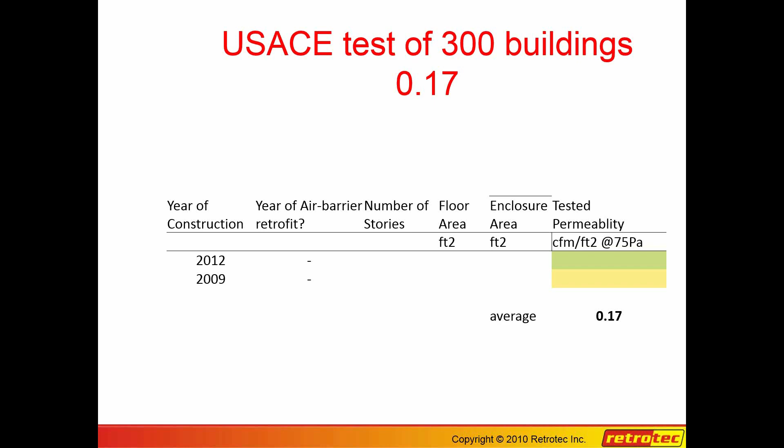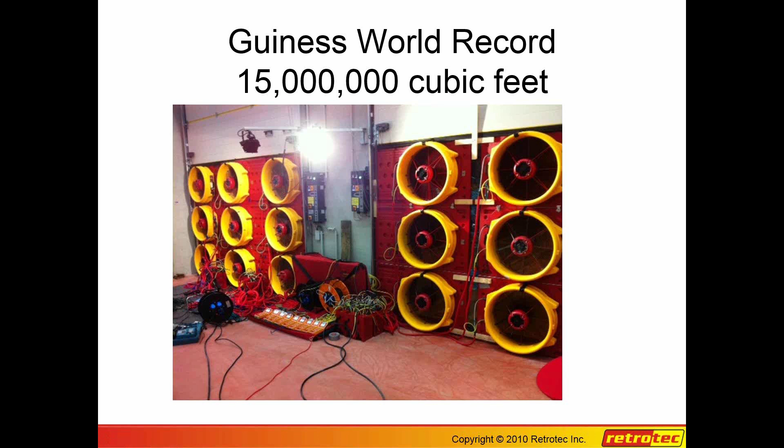So the simplest building that we can consider is just one big box, and pretty much doesn't matter where you put the fans. You can put them anywhere, and you pump up the box, you measure the pressure anywhere, and so on. So that's pretty simple. That's kind of what testing a house is like. You pressurize the entire house, even if you've got a partially open doorway. There's very little volume behind the doorway, very little surface area to leak, so you pretty much get exactly the same pressure instantaneously everywhere in the house.

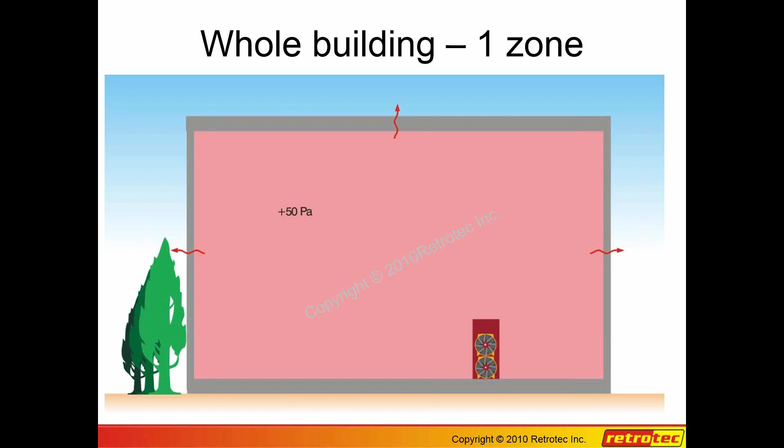So as we move on from there, we get more complicated situations, and I'll just look at our next slide here. There we go. So this is what a connection looks like in a large space. We're doing all the connections from outdoors simply because there's more room. Normally you do these tests from inside, but you should be able to do them from either side. With our equipment, the red tube always goes through the panel, and here you see it going through the panel into the inside portion of the building like this. And if you're inside, the red tube still goes through the panel.

And in that way, our fans are referenced, assuming that the red tube that goes to the red port is going through the panel. So since in this diagram here we're outside, the blue tube, which is, I guess, the positive side of channel A, is picking up the pressure outside. And here we've simply teed this off, so we've got a T on here, and we're picking up the pressure in 2 locations, roughly to the extremity on one side versus the other side of the building.

We're not going to get into a lot about the best places to pick up pressure. We're just going to look in this presentation primarily at how we should be making our connections. So here we've got, going to the fan, this kind of orangey brown connector, which is the control going to the fan, and we've got a yellow tube that picks up the flow pressure, and we've got the green tube, which is the reference port.

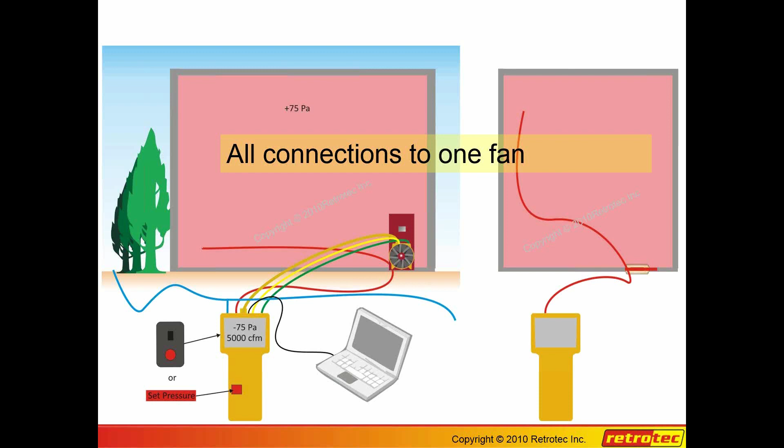There are some interesting connection possibilities that happen when we're testing large buildings where the reference pressure is being affected by another fan. When we have these self-referenced fans, we never have to worry about it. So just a word on that.

So this is one gauge hooked up, and here we're kind of breaking it down. We've got the gauge outside, we've got the red reference tube going inside, and we've got one large volume, so we can pick up that pressure anywhere, it doesn't really matter.

A good rule of thumb is if we've got one gauge, we probably need to pick up one pressure inside the building. By the time you get to 3 or 4 gauges, you probably need to pick up pressures in 3 or 4 locations. But usually one fan is doing one floor, or a volume of building small enough that a single pressure pickup inside will work. We can also, if we have to, tee them together and get some kind of funky averaging system inside the building, but usually it's not necessary.

So this is us outside the building, and this is what it looks like if we're inside the building. We reversed everything. You'll notice that now the gauge is inside. The red tube is running through the panel, same as it did over here. But now our pickup points outside are red tubing as opposed to blue tubing. The reason we color code them is so that you can't make a mistake when you make a connection. As long as you put color to color, you're okay. As long as red tube goes through the red panel, you're always okay.

We show over here that these tubes should be roughly about 25 feet from the building. The reason for that is that when the wind blows, it tends to impact the wall and create a pressure field around the building that fluctuates much more than it does, say, 15, 20, 25 feet away from the building. This is the area where you get the least pressure fluctuation due to wind, and it's something anybody testing large buildings needs to spend a fair bit of time experimenting with, putting tubes in different locations and watching the effects.

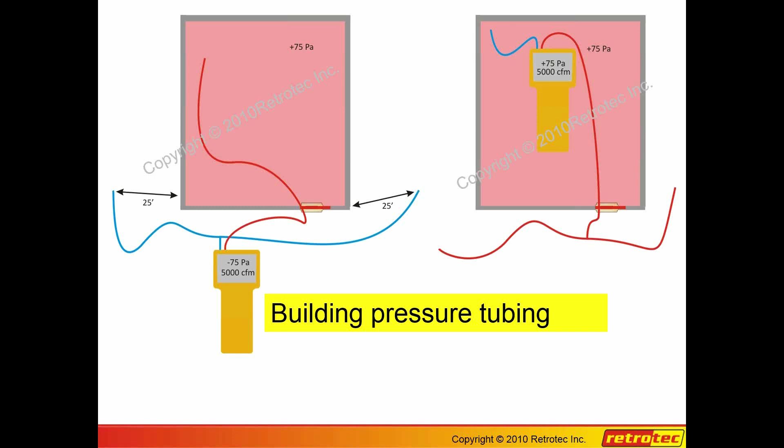So let's carry on to slide number 8, I guess. This is just kind of a review - read building pressure, flow reference. I've already gone through that, so we can hippity hop along here.

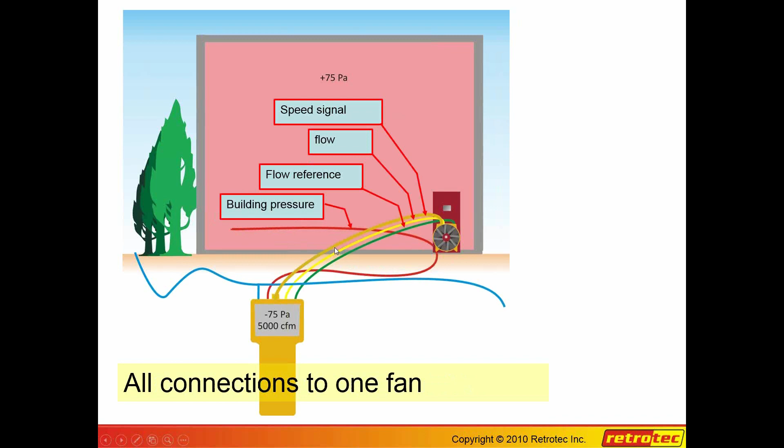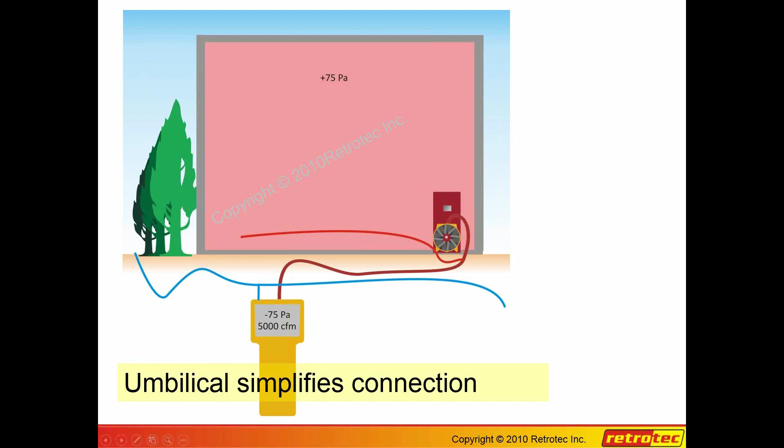In this slide we've shown how we've taken this confusing mass of tubes - 1, 2, 3 tubes and one wire, maybe even a charging wire as well - and cleaned it up into one umbilical. This makes setup much easier since you attach the umbilical on one end to the gauge and the other end to the fan, and you're good to go. Those of you who use our equipment are familiar with that umbilical approach.

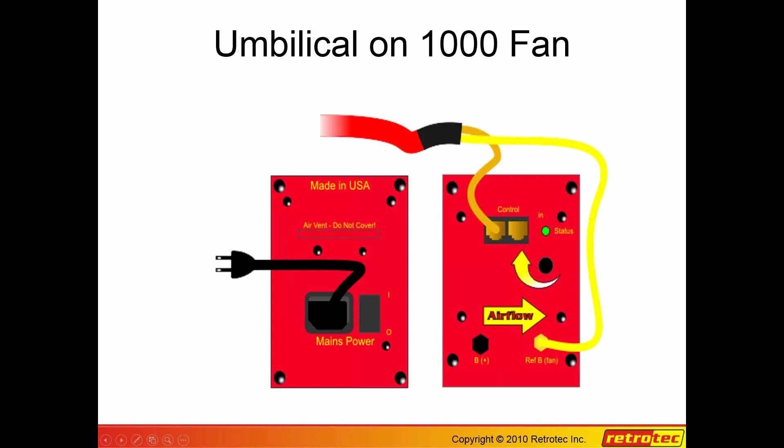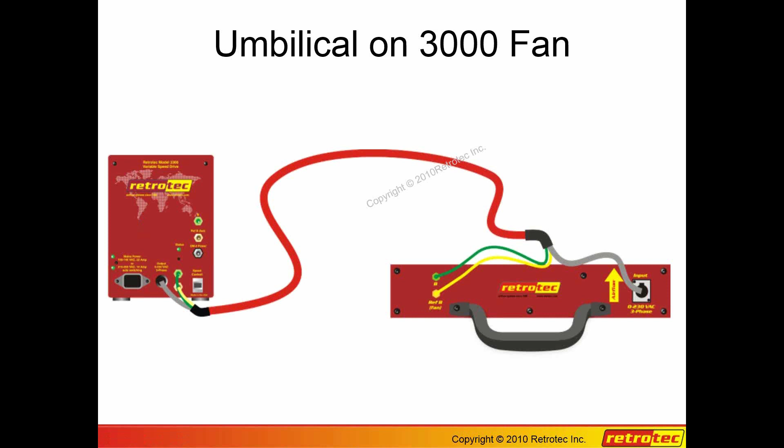Our manuals do a pretty good job of showing this, and here we've got an umbilical that goes between the top of the fan and, in this case, the variable frequency drive. This is one of our older units - we have pictures of our newer ones, which we'll get to later.

The first connection to look at is how we control our fans. In this case we're standing outside with gauge number 1, which we can call our master. This master is basically enslaving all 6 fans, so our control signal is going from 1 gauge to 6 fans. All 6 fans receive the same instruction, maybe go to 50%, and they all go to 50%. Those 6 fans act like one big fan - they just happen to have 6 separate fan blades, all going in concert up and down together.

If instead we sent 6 separate control signals to those 6 fans, if one picks up speed a little bit, another one might slow down, and you can get a situation where one fan stops completely and the other fans take over the whole load, becoming a big hole in the building. With regular house testing fans that use permanent split capacitor (PSC) motors, if they stop and there's enough pressure in the building, that fan can actually start spinning backwards and even run backwards. I've had situations where I got 5 fans running forward and 1 fan running backward, and that building showed as being a lot leakier than it actually was.

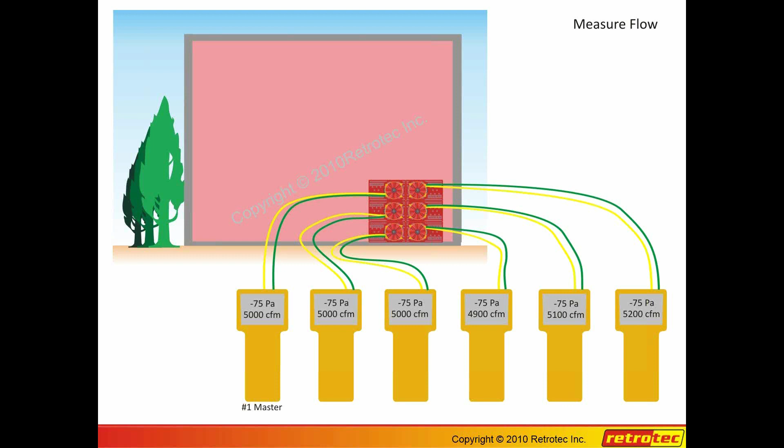Okay, now we're looking at the building pressure. We're looking at this one layer at a time. We looked at the control signal, we looked at the flow signal, and now we're looking at the channel A signal, which is the pressure we're achieving in the building and the pressure we're picking up outside.

What we encourage here is that we want each one of these gauges to receive the same reference pressure. Maybe reference pressure is a bad name -- the outdoor pressure should be the same on each and every gauge. So what we've done is we've picked up our pressure with the blue tube in two locations. We've teed it together, manifolded it all together so that each and every gauge is receiving exactly the same pressure on the input port of channel A.

So in this case we've got a red tube that goes through the panel and picks up pressure here. Another red tube goes through here and picks up pressure here. Another red tube goes through here and picks up pressure there. We've taken that pressure and just copied it or paralleled it up so that all these are getting the same pressure basically. I'm not sure why we did that, but in this particular example we don't really need to measure pressure everywhere in this box because it's going to be the same everywhere.

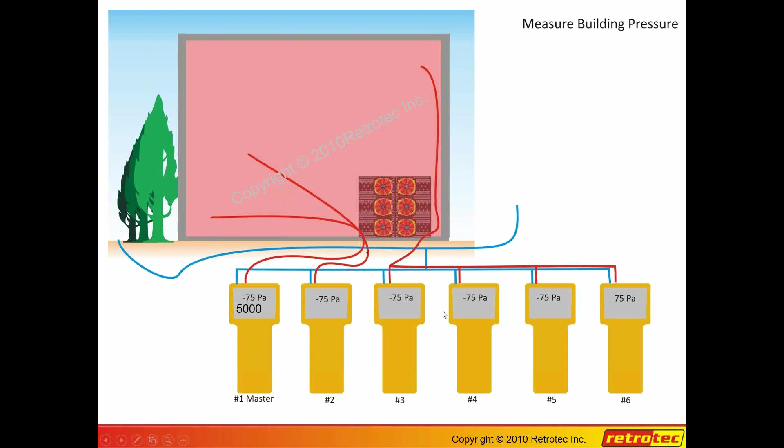So now we want to go into the individual control versus common control. Now, on the previous example here, we had common control. So we'll just back up to here. So common control means that each one of these fans is receiving a common control signal. So these are all acting as a unit. We may not always want that, and we need to be able to recognize when we want common control and when we want individual control.

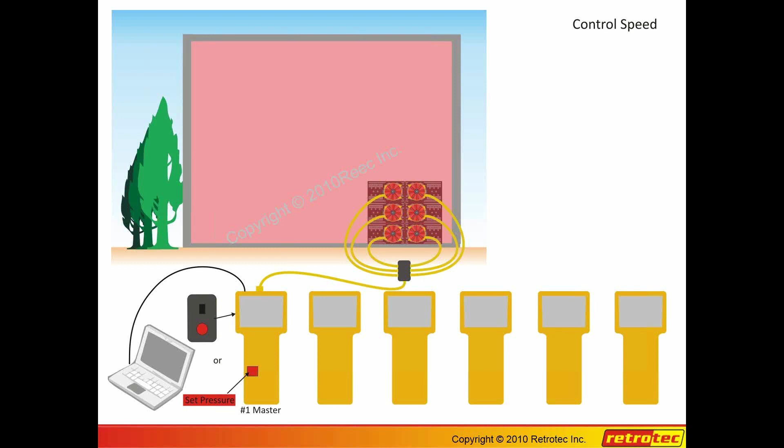The example I mentioned earlier, where one fan has got its own flow signal, it's got its own control loop, it could actually start running backwards, so we don't ever want that. So let's just advance back to where we were and take a look at individual control.

I guess I'm kind of starting this with different pressures that we might see inside an enclosure and why we might see them. So in this case, we've got a relatively small hole here, and we've got, let's say, 75 pascals here, and we've got 72.4 pascals over here. There's a difference there of 2.6 pascals. We're not actually achieving a common pressure inside the enclosure.

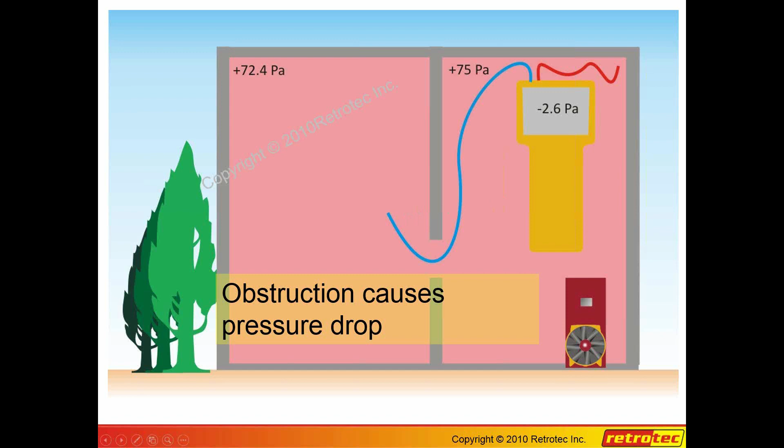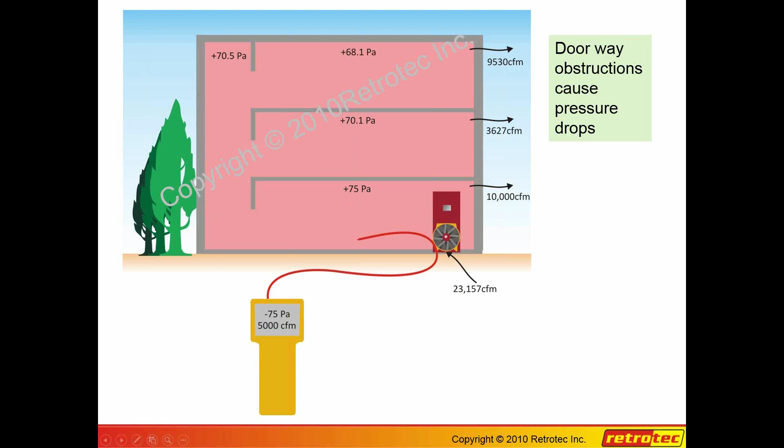Let's see if we have another diagram that will show this a little bit more graphically. So in this instance, we have one fan down here, and we've got a pressure there of 75, which is where the fan is blowing. So if we're controlling to that, we're controlling to 75. By the time we get up to here, we're at 70.1. By the time we get up here, we're at 68.1. So what do we do about that? And here we're controlling to the pressure on the mid-floor, so this is over pressure, this is under pressure.

So one way to do that is to try and distribute the blowing power around the building. Very commonly, we will have a stairwell at either end. So often the stairwell is a really good way to drive the airflow up into the upper floors. So we've got it coming from 2 sides. If we put 2 fans into one stairwell here, we would get excessive pressure drops inside the stairwell, so the pressures up at the top would be less than that.

I recall the test that we did, it was a 3-story building. We had 50 pascals on the main floor, and we had something like 25 pascals on the top floor because we didn't have enough stairwells open to the top floor in order for the flow to get there.

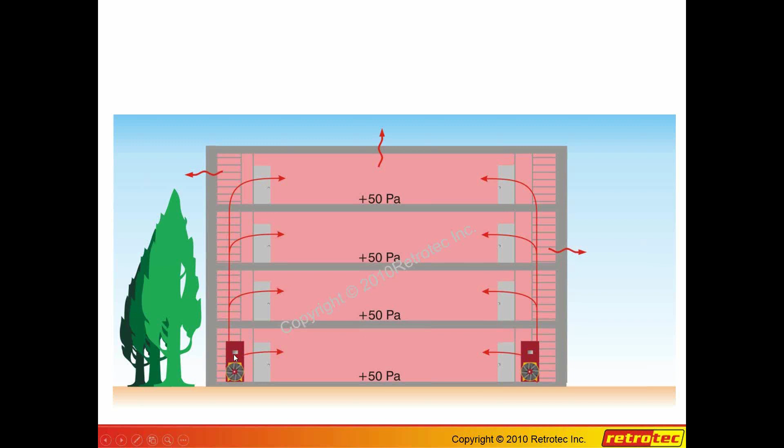So in this case here, we need to have probably individual control, since each one of these fans is controlling to its own pressure. So if the pressure was a little bit high on this end of the building, then this fan would take care of it. If it was on this end, then this fan would take care of it. I can't remember what this was there for exactly.

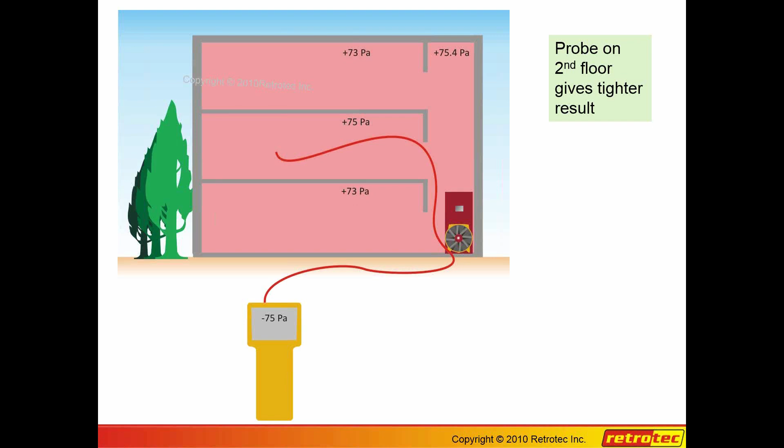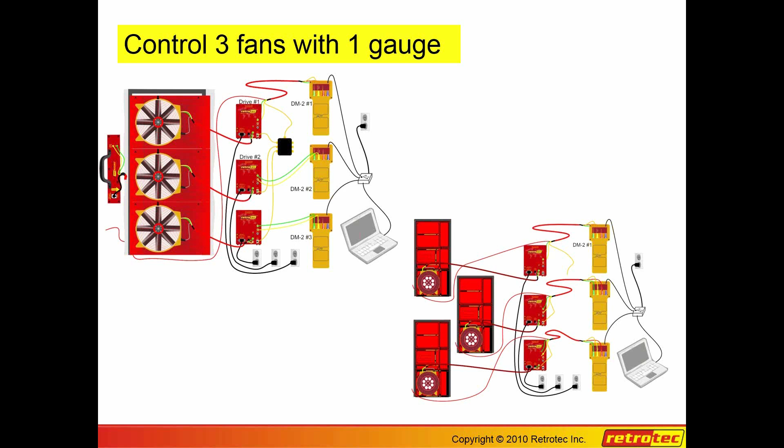And then there's a third one, which is hybrid control. There's actually a fourth one also, where you may have 2 banks of fans on each end of the building. Each one of those banks is common, but they have individual control with reference to the pressure they're controlling on their end of the building. I think I have a diagram that shows that later that will make that clear.

So what this would look like with the DM2 configuration, for example, is we have the gauges which are close to the computer in this case. So the gauges go into a hub, the hub goes into a computer, so it looks at all the different fans we have out here that could be 20, 90 feet away, that kind of thing. So here we're actually extending the tubes from the fan all the way to the gauge. So that's the way we used to do it.

This is with the 3350 control. So do we have common control or individual control? So we have a signal coming from this gauge. It says control. It's running into this fan, and the new controls all have the ability to daisy chain the controls together. So the signal comes in and then comes back out and into the next one, back out into the next one. So all 3 of these controls are receiving the same control signal.

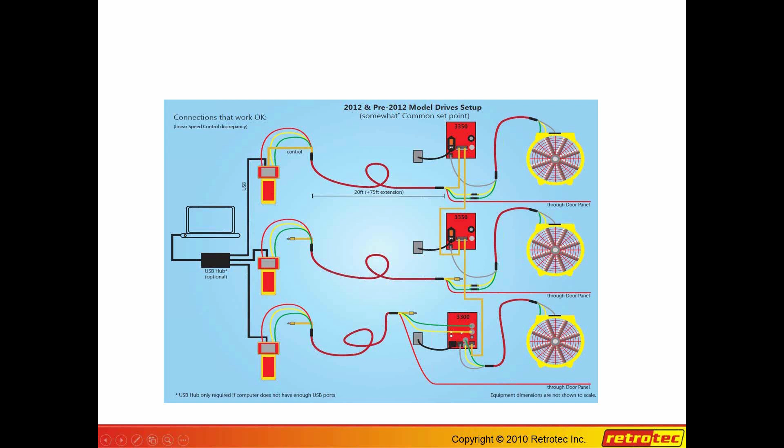Each fan receives the same control signal. Not necessarily that the flow going through the fan will be the same. So the flow signal comes back through here to its gauge. This flow signal comes back through here to this gauge. And notice here in this diagram we've shown this control connection is disconnected. This gauge is not controlling anything. This gauge is controlling everything. So this is our pre-2012 setup. So let's take a look at what we're doing now.

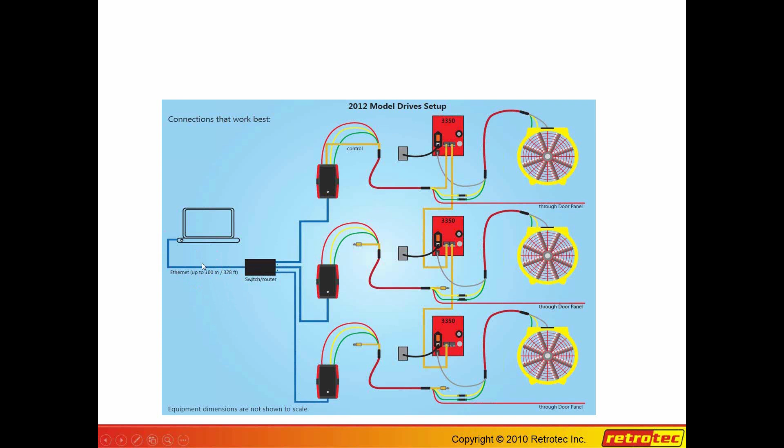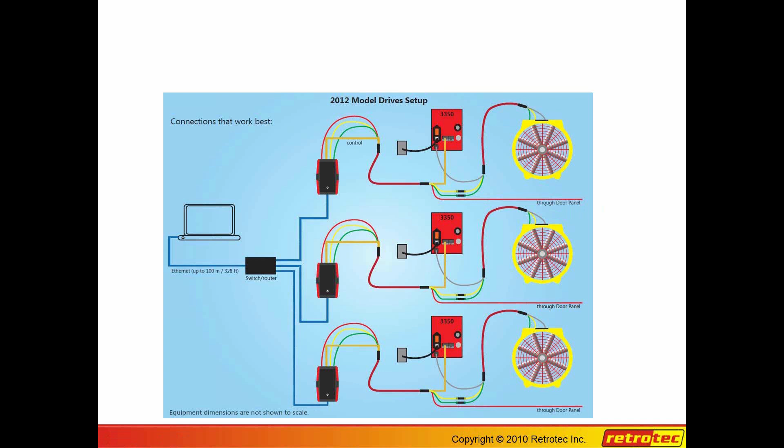So you can create common control simply by wiring it in such a way that one control signal is daisy chained into all 3 fans. You can also make the change in the software where you have individual control cables going to each fan, but you simply uncheck the individual control box, which means unchecked is common control, and that means that the number 1 gauge that you've chosen is the one sending out the control signal.

So this is global, meaning it would change the signal going to every fan that you had on your network. It would be either individual or common. In a lot of cases, you want to have individual control, meaning the software is controlling the East Bank and the West Bank individually, but yet the fans within that bank were commoned, if you know what I mean. And the best way to get a handle on this is to go through our exercises on that so you can experiment in a relatively small space and you can see the effects of individual versus common control.

What you don't want to do is to get into a great big huge building test with fans running and roaring all over the place and oh my God, this fan's going backwards and this fan stopped, and it can be really crazy. So you really have to get a handle on this, and if you haven't, you need to do that before you get into a job site situation.

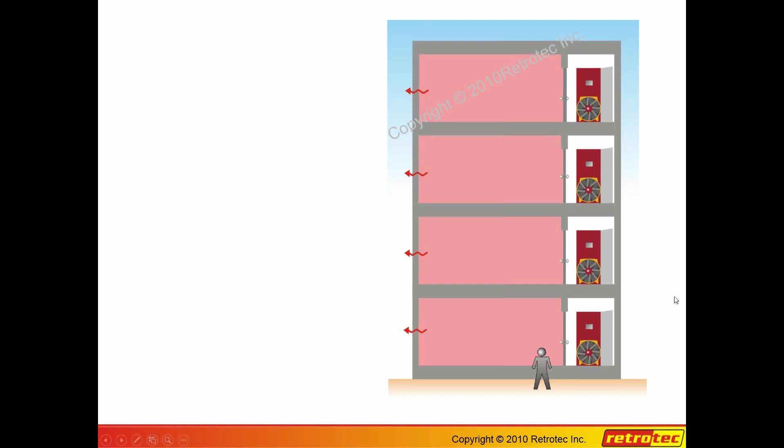So here we have a situation where we've got outdoor balconies, let's say, and we want to test the entire enclosure leakage, and we can stick a fan on each floor. So it would be interesting to have you consider, do we want individual control or do we want common control? Since the results of the flow from this fan aren't felt very much in this space, we want individual control, so each fan is controlling its own space. Okay?

This is actually a pretty common example of what you would need to do to test, say, row houses where you wanted to eliminate the connection between the units so that the pressure across these units would be close to 0 if each one of these was set to 50. Now what would happen is they would all be receiving the same control signal or set point. They would all say, go to 50 pascals, go to 50 pascals, go to 50 pascals.

The signal that would come out of the fan that would cause it to go to 50 pascals might be different because this unit is probably a lot leakier than this unit. This unit is leakier than this unit. So this fan might be at 60%, this one at 30, it's at 25, this might be at 80% to achieve the same pressure in those results. So that's where individual control would come in.

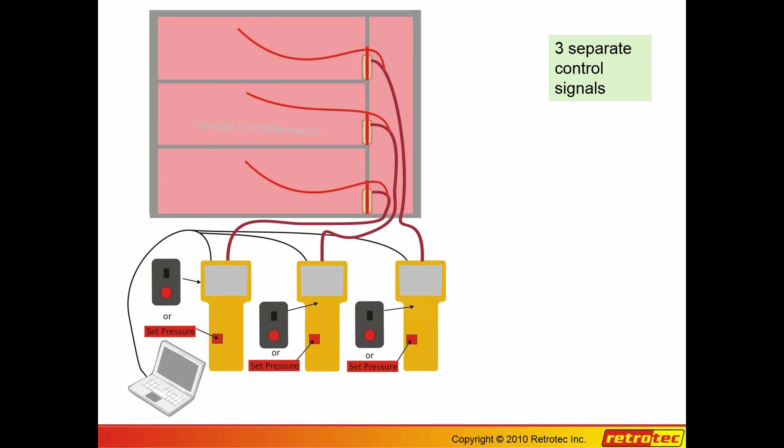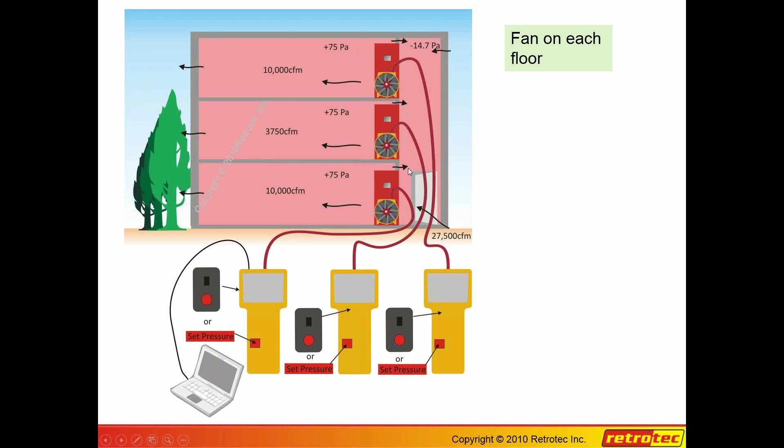So we have a fan on each floor. Again, this fan in the middle is probably blowing a lot less air, 10,000 CFM, 10,000 CFM, and 3,000 some odd CFM in the middle. So obviously the fan in the middle is blowing a lot less air. And in this case, we've got the stairwell open. We're sucking air from the stairwell, and we're controlling all of our fans individually.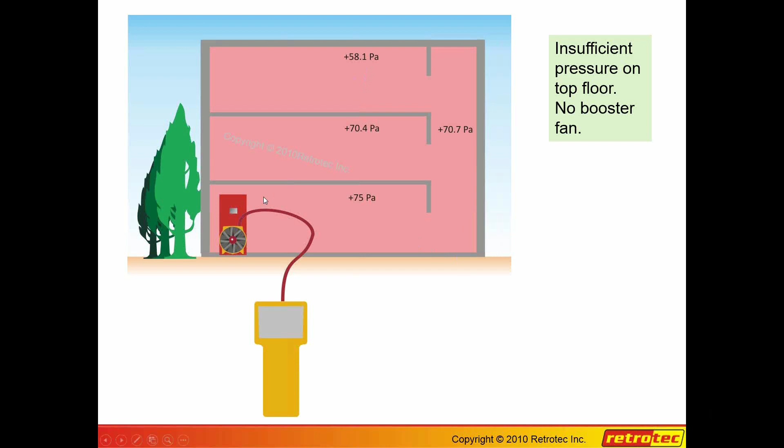Sometimes we're in a situation, very common, where the top floor can be very leaky. We have one fan on the ground floor, and we have insufficient pressure on the top floor. What we can do in a case like that is to run another fan on the top floor, and the purpose of this fan is not to measure flow. In this case, we're actually setting the pressure to 0 between floors, so you can see now we've got this up to 75 pascals. So we're setting it to 0 between here and here.

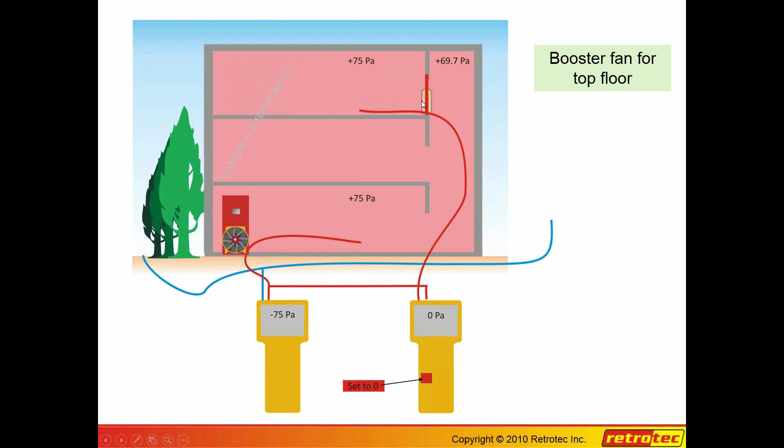When this drops down, this automatically sees that there's a gap there of 7 pascals, and this fan is boosting the pressure onto this floor, or actually decreasing the pressure in the stairwell, in order to keep this floor at the right pressure. So this is what we call a booster fan, and it's not part of the flow measurement device. We simply hook it up. We don't take the flow signal and put it into our software.

All we do when we start is we go set to 0. And then the moment that pressure goes away from 0, it starts controlling on its own little control loop. But we do not measure flow. Here we go, set to 0. That has to be done manually. The software won't do that. You might even want to run that fan manually with a control knob, but we can make it run automatically.

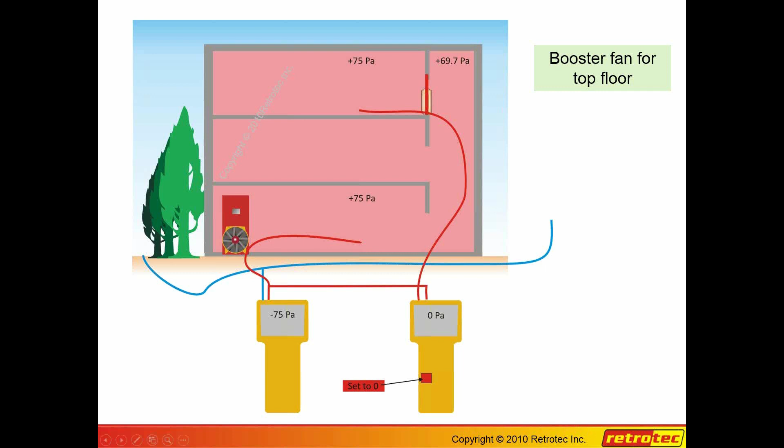Another way to do this is to measure a floor at a time. So in this case here we're measuring the 1st floor, and we're using this fan to neutralize the pressure between these floors. So here again we're using the set to 0 function. That's to find out how much this unit is leaking to outdoors. So we've neutralized the pressure across here. So this is a way of isolating leakage in one part of the building.

Sometimes this is a technique that you would use when you're doing an analysis of a very, very large building and you only have access to a small piece of it. You can actually neutralize the pressure across the floor or across the wall using this technique.

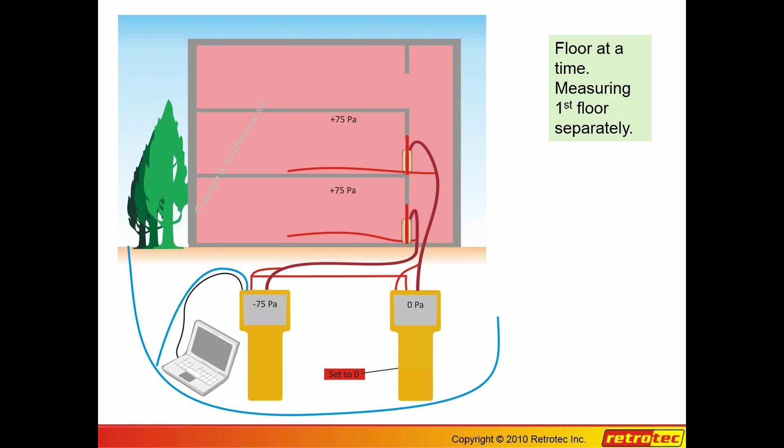So in this case, we're measuring the leakage of this unit, and we're neutralizing the pressure on the first floor and the third floor with the set to zero fans over here, and we're measuring the flow rate with this fan. This is kind of advanced testing. It's something that you really want to experiment with, so you're sure you're familiar with it, but we wanted to show you how you hook these things up. So these connection diagrams are accurate.

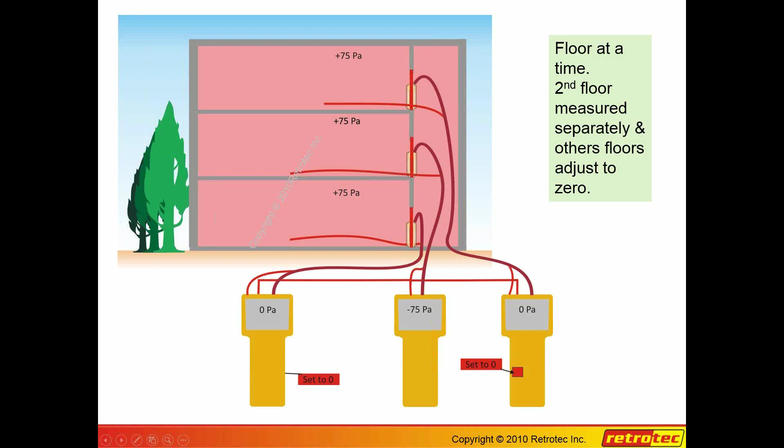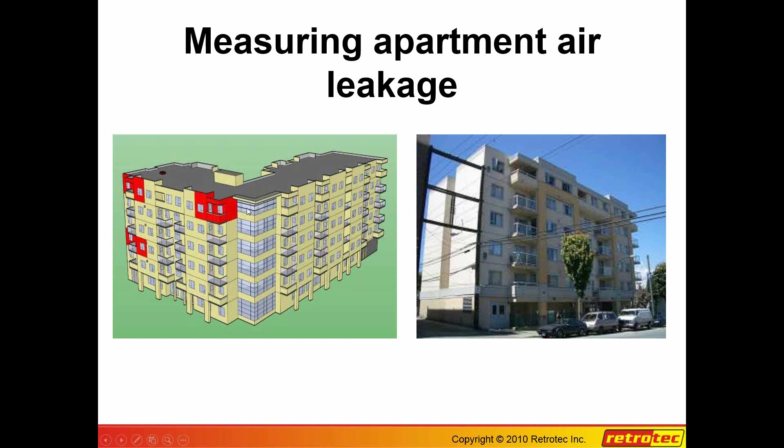Measuring apartment air leakage. Okay, this is part of a study that we did here in Vancouver. These are the individual apartments that we measured. We measured the leakages on all 6 sides using the techniques that we showed you earlier. So the first one is what we call a simple apartment test. I just have to catch up with my multiplicity of slides. Here we go. So this is what it looks like configured the way we have been showing it so far.

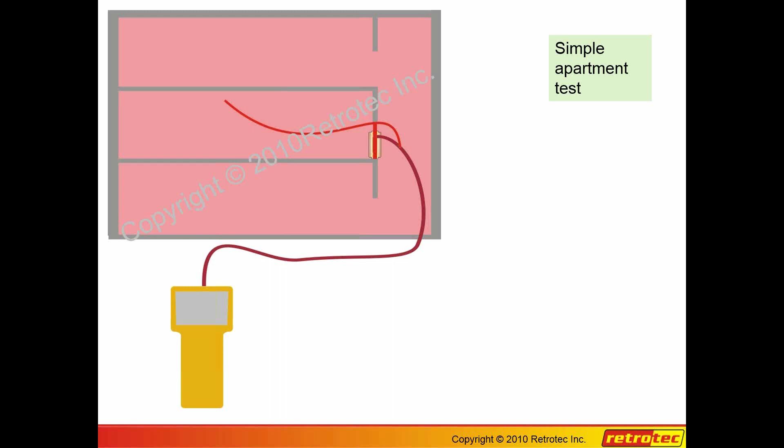Normally, when we're doing a simple apartment test, we're going to be in the hallway. Or in this case, this is a type of construction used in some parts of the country where there is an exterior hallway which is open to outdoors. So that requires its own particular technique. So in this case, we're measuring all 6 sides of this particular apartment, which is what you would do for LEED testing or something like that.

I notice there's some questions about individual control. The best way to learn about individual control is to have it mess up. And you really have to purposely mess it up so you can see, okay, I messed it up, and now I went to individual control and I sorted it out. Or I messed it up and I went to common control and I sorted it out.

If you don't see it mess up, you'll never see a need for it, so none of the stuff will make any sense whatsoever. But when it messes up and you're on the job, you go, oh my God, what the heck is going on here? You know, people say, oh, my fan needs to be calibrated. It must be reading wrong. Individual or common control could be one of the reasons why.

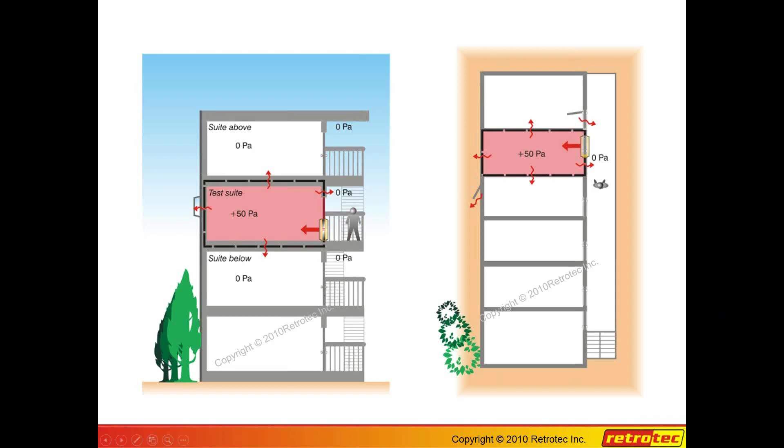So here we're talking about zone isolation. We've got a different configuration of building. This stairwell or this hallway is inside the building. So again, we're measuring an individual apartment. It's got 2,000 CFM leakage to the outside. And in this case, we've got a fan that's mounted in the hallway. We're pressurizing the hallway to 50 pascals.

So if this pressure or this flow dropped from 2,000 CFM to 1,800 CFM, guess what? There's roughly 200 CFM leakage across this particular wall here. So that's what that's told us. So that's one piece of the puzzle that we've been able to figure out.

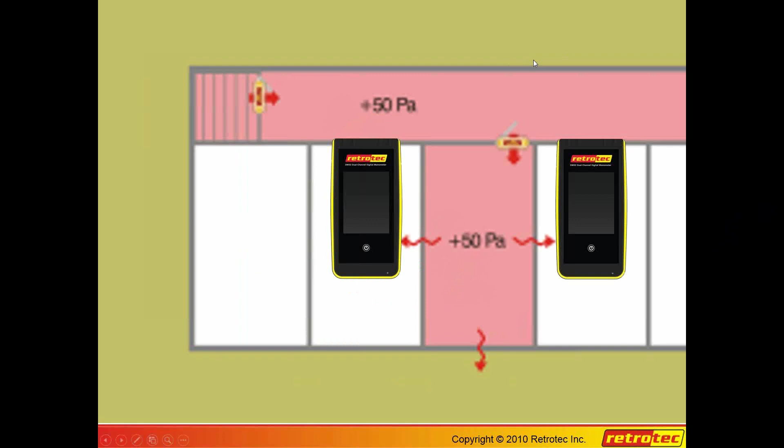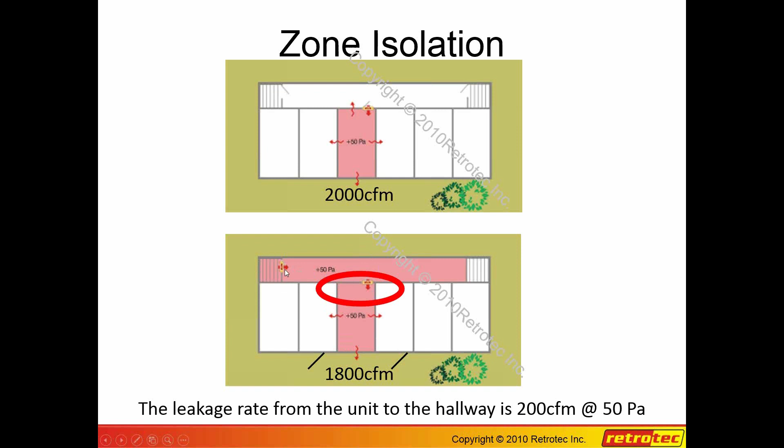So this slide, let's see. Oh, there we go. This is a bit fuzzy because we kind of blew it up, but it's the same one that we looked at before. I'll just go back so you can reorient yourself. So we're taking this slide, we're blowing it up, and we're asking ourselves, how the heck did we tube these fans together? So we're going to look at that in detail so you can get one tubed up right.

So this gauge goes to this fan. We've shown it stuck on top of the apartment, but it would actually be in the hallway; it's only this big, so we've blown it up a bit. This gauge here is going to be controlling and measuring the flow through this fan. This gauge is not measuring anything except the pressure in the hallway. It's not measuring flow at all. It's a neutralizing fan that's neutralizing this pressure across this wall. Okay.

So the only measurement that we're making is a flow pressure measurement between the gauge, channel B, to the fan; that's going to tell you what the flow rate is through this fan. Then the red tube is going to go again through the panel into the apartment. It's measuring the 50 pascals. We got that.

Channel A of this fan is measuring the pressure in the hallway at 50 pascals. So we set to 50 here, set to 50 over here. The two of them balance each other out. What you'll notice is when this fan starts up, this one's going to wibble wobble back and forth until the two of them go into balance.

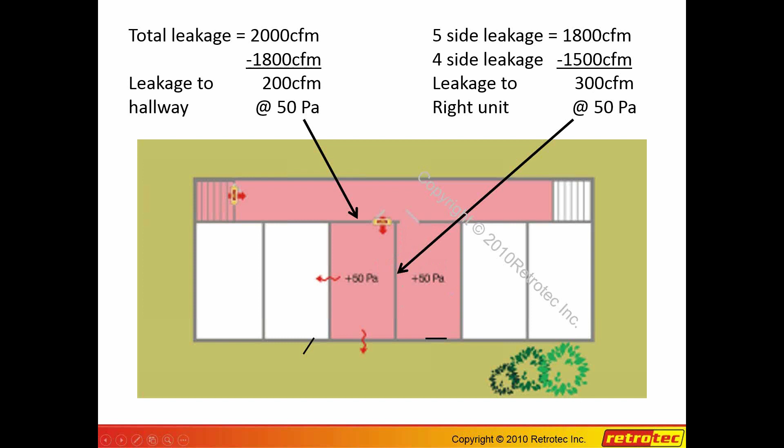Using a similar technique, we can diagnostically find out where each apartment is leaking to. It will characteristically leak between floors, into the hallway, to outdoors, or to the apartment on either side, depending on the construction, and not necessarily even on the construction materials or the design. We've noticed that different buildings will just leak in different directions, and often that will tell you why they're having certain problems. It might be air quality, it might be this or that, but that tells you a lot about what the dynamics are between the units.

My contention is ideally that each one of these units should be as isolated as possible from its neighbors, for the purpose of energy, which is minor, but more importantly for sound, odor, pollution, that kind of thing. I think these need to be a series of sealed boxes, having their own connection to outdoors for fresh air and so on, and I see a trend in that direction for new buildings where they're not reliant upon even an HVAC system common to the entire building. Individual HRVs for individual apartments are starting to find their way into designs, and I think that gets around a lot of the problem of how these buildings get all hooked up and what happens in one unit affecting another.

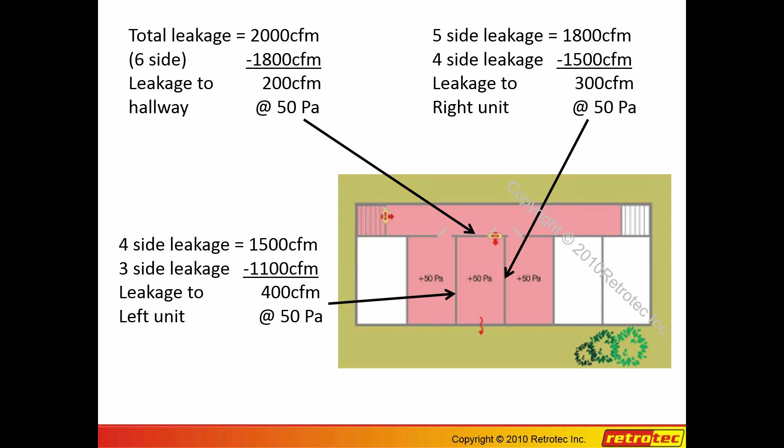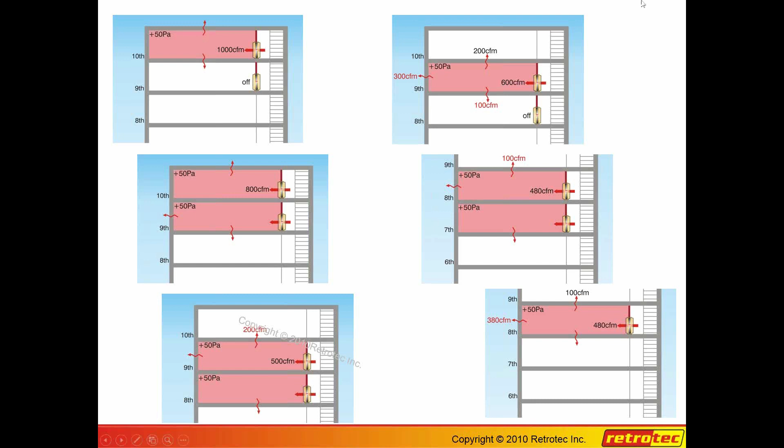So here we have a series of 3 fans running, and by turning various fans on and off, we can find out not only what the leakage is of this unit to the outdoors, but also the leakage between units from floor to floor. So we can really find out a lot by doing this kind of analysis. It's important that you get the procedure down of measuring the leakage between 2 units before you start worrying about doing 3 or 4 units at a time, which is what we're doing here. So it's a matter of starting at one point and moving forward so you can increase your skills and use this as a powerful diagnostic tool.

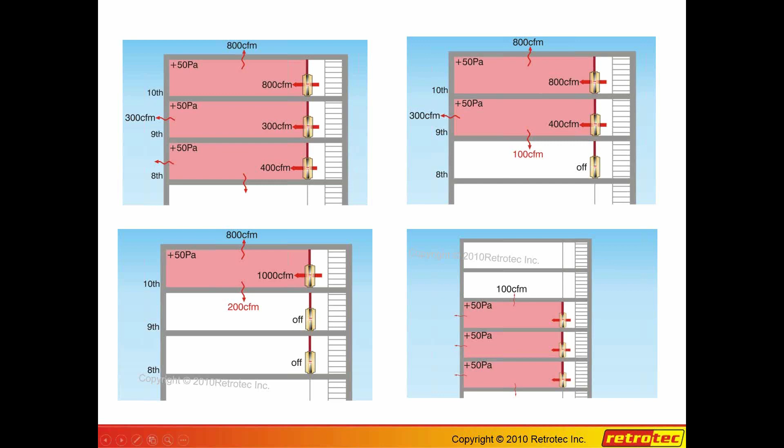I think there's some kind of annoying timing on this slide here that's jumping off the screen for me. Oh my God. I guess I'll have to keep defeating it all the time.

I need to find out who put this wonderful feature in here so I can kill them.

So this enables us to bring the gauges up, and whenever we're doing a test on a large building, we always want to run each fan through its paces, make sure it's connected, make sure the tubes are doing the right thing, that they're sending signals in the right direction, that we have a positive control, and so on.

And you can do this by running a virtual gauge, and each one of these gauges represents a gauge that's somewhere in the building connected to it by Ethernet cable. So we can look at each gauge individually, we can check it out, we can check out its control loop, make sure it's functioning properly.

So here we show one coming up, and here 4. We can resize these and make them any size we want. We can put 25 of them on the screen if we want and drag them around.

They show you the serial number of the gauges, so wherever your fans are located, you can create a little diagram for yourself that shows you where the different gauge serial numbers are located, so that when you come down to your unit and bring them up on virtual gauge, you can say, oh, that's this one, that's that one, and so on.

Once you're done with virtual gauge, you can shut those down, disconnect those electronically, or through the virtual gauge, close virtual gauge down altogether, and then allow FanTestic software to pick up on those connections and run them into the FanTestic software. So you can either do one or the other, but currently you can't do both.

So the way we're tubing them up now, you actually have the gauges at your computer so you can look at them. This is a way that you can, with the DM32 gauge, actually look at the gauge remotely and control it. It's two-way control. Whatever you do on the gauge happens in virtual gauge. Whatever you do in virtual gauge happens on the actual gauge. So it's two-way. You can control it from either end.

If you get someone on the 3rd floor and they monkey around with your gauge, you can see exactly what's going on there. I think it's a very cool feature and a great little training feature as well, but particularly on a job, you don't want to be running up and down to the 10th floor to find out what's going on with the gauge to see why you aren't getting a signal out of that. All that needs to be done in advance.

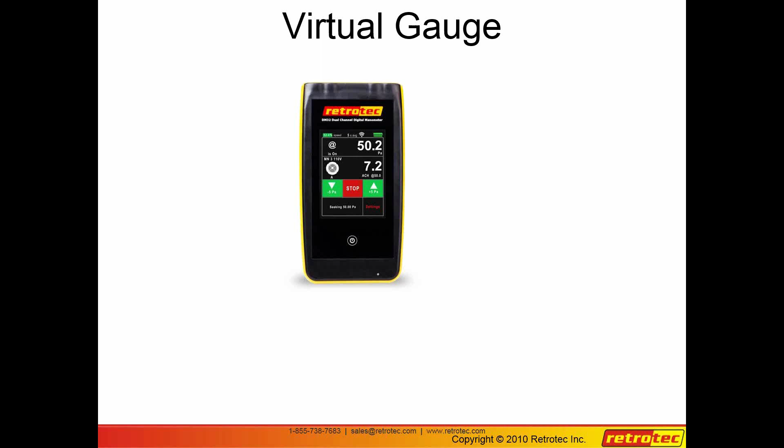Monitor and control several gauges simultaneously.

This is where you get virtual gauge. Let's see, I'll have to try and back this thing up.

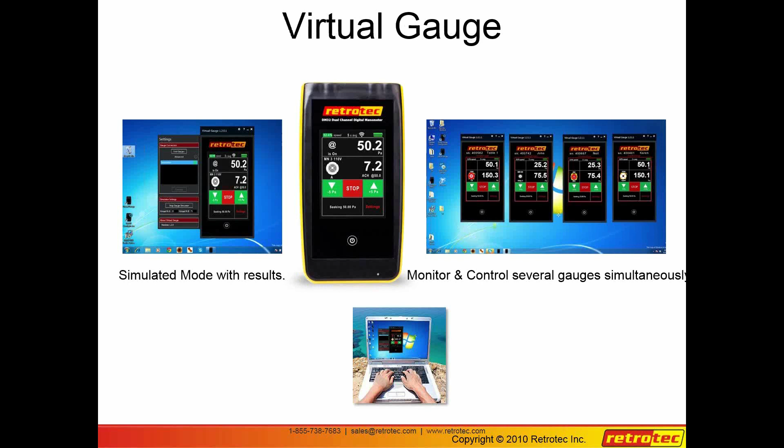On our website, you can just click on virtual gauge here and you go right in, and it's a free download. It'll run on any computer. You can actually simulate the gauge and try out all of its features without even having a gauge.

So you have the choice of simulated mode, where you've got a gauge that functions like a gauge, and an actual mode, let's say non-simulated mode, where you have the option of connecting to any of the gauges in the system.

For those of you that have energy conservatory fans, our gauge does a great job of controlling them. We have an adapter which controls their gauge. So our control signal goes into the adapter, and then it's translated into a PWM signal that controls their fan, and the flow signals come back, and our software handles their flow signals correctly. It's the control signals that are a bit tricky.

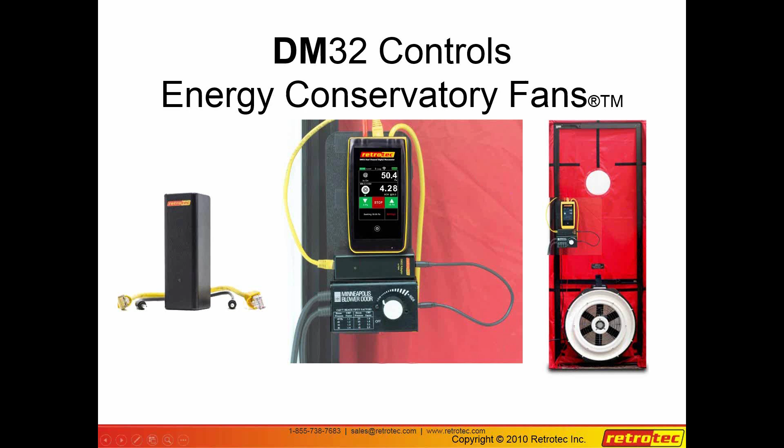Flow signals, no problem. All of our software will work with any fan out there. So you can combine energy conservatory fans, Retrotec fans, Infiltec fans, anything you want, as long as they're running on a DM32 gauge. A very cool little feature. Let's see what else we got here.

The great thing about this software, I believe, is that you set the parameters and it does it for you. So for baseline, for example, you say I want to take 12 baseline readings for 30 seconds apiece, and then shut down and cover my fans. Or take 12 readings for 20 seconds apiece, and then immediately start running a test from 25 to 50 pascals. I want to take each induced pressure reading for 45 seconds. My criteria for attaining the desired pressure is that it be within plus or minus 0.5 pascals, 1 pascal, a certain percentage, whatever you choose.

Once you set it up, you just press the button and it goes and does everything for you. It makes the decisions. You don't have to control any fan, you don't have to make any decisions, you don't have to touch anything. It records all the data.

If you happen to get one test point which you don't like, you can go in there and repeat that test point. There's a semi-automatic mode, so if you have one test point where a door opens or something happens that you haven't considered, you can go back and repeat that point and put it back into the software.